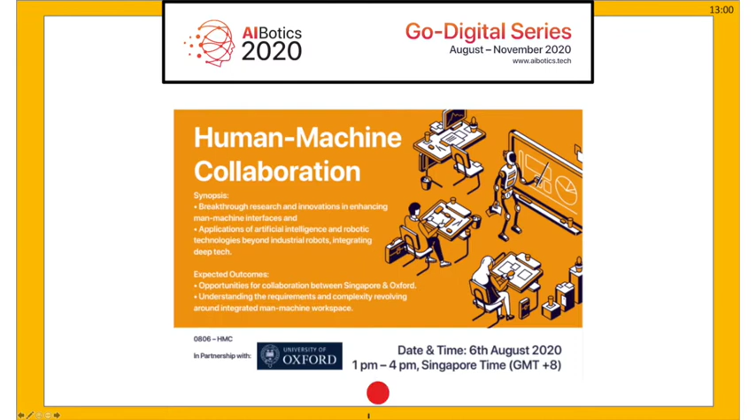The first presenter is Professor Nick Hawes, representing the Oxford Robotics Institute. Nick is leading as a principal investigator this Oxford research program, and he will deliver a talk about the long-term

and large-scale autonomy. Thank you for the invitation to speak, and thank you for all the amazing introductions from the invited speakers beforehand. So it's a great pleasure to be here speaking on behalf of the Oxford Research Pillar within the Oxford-Singapore Human-Machine Collaboration. I'm sharing the session with a colleague from Singapore, Professor Marcelo Ang from the Advanced Robotics Centre at NUS. I'm, as Sarolta said, representing the Oxford Robotics Institute at the University of Oxford.

And we're paired up together because we both have similar interests in this question of large-scale and long-term autonomy. And our work focuses on, I'd say, enabling AI and robotics technology for human-machine collaboration, but not really the direct interaction of humans and machines, more about how we build autonomous systems that work for humans and alongside humans in a range of environments. So those are our main interests, and what we're going to talk about here is really the research level work that's going on, and as is natural with robotics and autonomous systems, how this is applied in various ways as well.

And they're going to be fairly brief presentations, and then we're going to have a little bit of discussion between the two of us on what we think maybe some of the open issues are. Okay, so that's the intro. I'm going to dive into my slides.

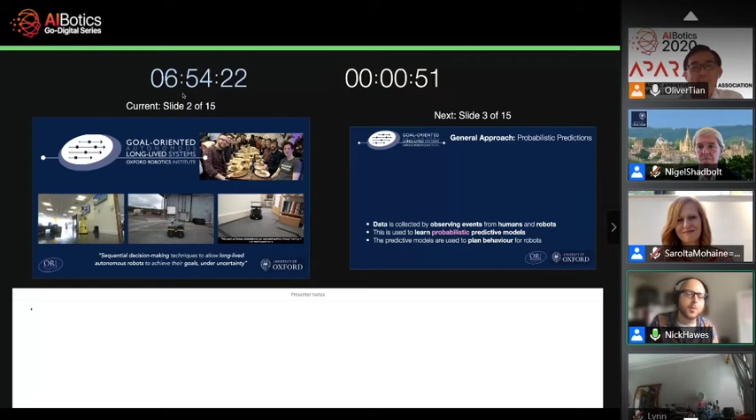So autonomous decision-making under uncertainty is key for robust, successful, safe, responsible developments and deployments in robotics in a range of applications. And I'm going to give you some examples of particular applications that we're interested in and particular angles that we're interested in as we go through the slides. So I thought I'd start off with maybe a general approach to talking about how my group works on this topic. And we think about the world in terms of probabilities because we're worried about uncertainty, and predictions.

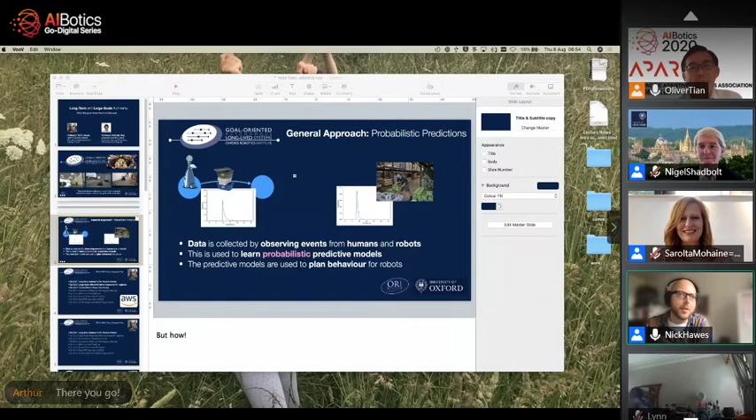So our systems work, oh crumbs, I'm sharing the wrong screen. There we go. Sorry. I tried to make this better and I shared the wrong screen. There we go. Right, sorry, give me a second. Right, well that's highly embarrassing. I think we're all hyped up for our level of technological prowess, then I make a rookie mistake on the sharing. I wanted to change the screen from my desktop to my laptop so I could look at you while I talked, and then I shared the wrong screen. Excellent. In my defense, it's before 7 a.m., so I'm going to apologize for that. Right, maybe in case you didn't see, that was the intro screen.

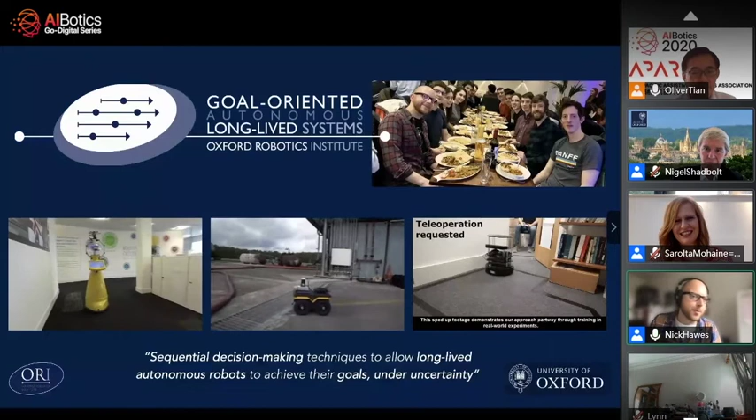Here I talked about the research of my group, and then we'll jump into the key topics of how we work. So we work with probabilistic predictions. The general idea is that when a robot acts in an environment, it performs tasks, whether that's moving from A to B, whether that's picking a package, whether that's interacting with a human. It performs those tasks repeatedly. And we can gather data. So Nigel talked eloquently about the role of data in robotics and AI. And we can use it in terms of characterizing the performance of a robot. We can capture that into some kind of probabilistic representation.

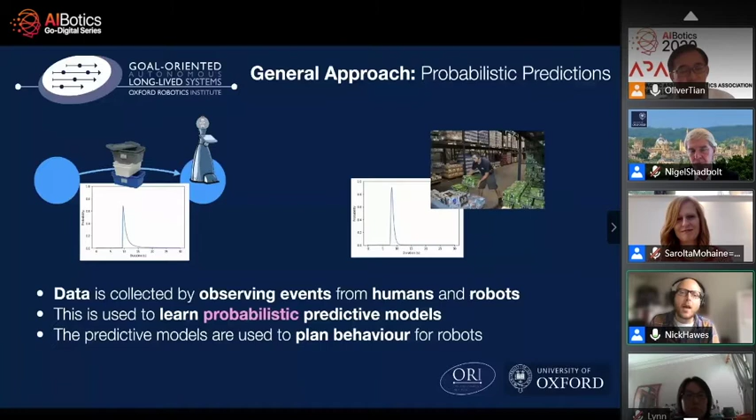And we can do the same with human behavior. So when a human's performing a task, such as picking a crate in a warehouse or servicing a car in a garage, we can model all of these things in terms of their probabilities, how successful they are, how long they take. And then we can embed these predictive probabilistic models into structures that allow us to plan for how robots and how humans should behave to best deliver successful tasks under that kind of uncertainty.

And this is an approach that also, as Nigel said, mixes different technologies. We're interested both in machine learning to gather and capture these probabilities, but also more traditional plan-based and model-based AI, so hybrid systems that allow us to reason about the structure of these models and robot behavior under these kinds of uncertainty.

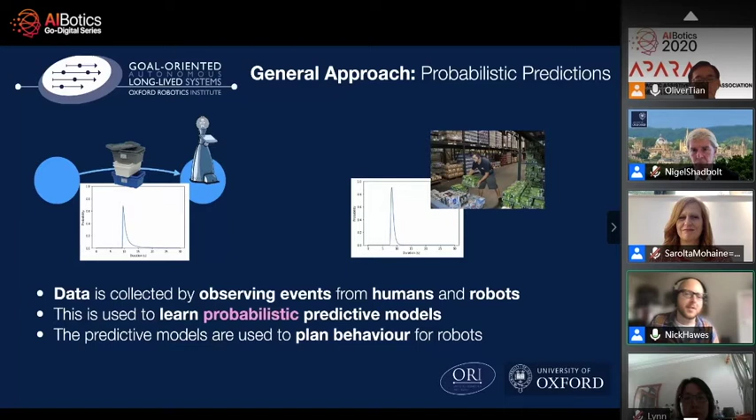So I'm going to talk about these techniques, so this kind of approach applied to 3 projects out of the 8 that's going on within the Oxford Singapore research pillar within the Human Machine Collaboration Initiative.

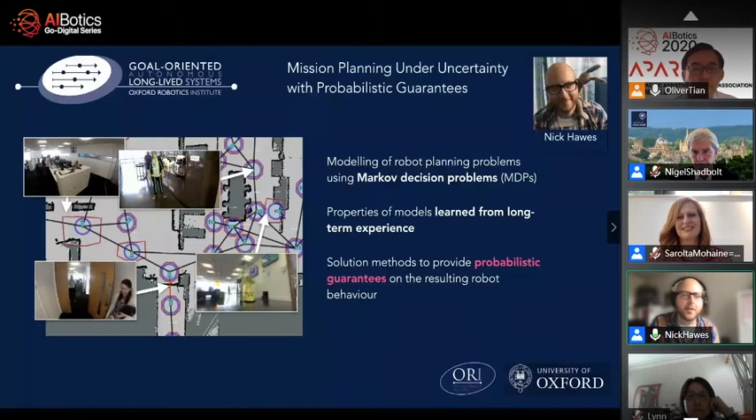And this is really important because what we found when putting robots into care homes, into offices, is that they encounter all sorts of failures. And those failures prevent the robots working successfully, and they also can cause hazards or delays in operation. So what we do is we take this general approach of running the robots in these kind of environments.

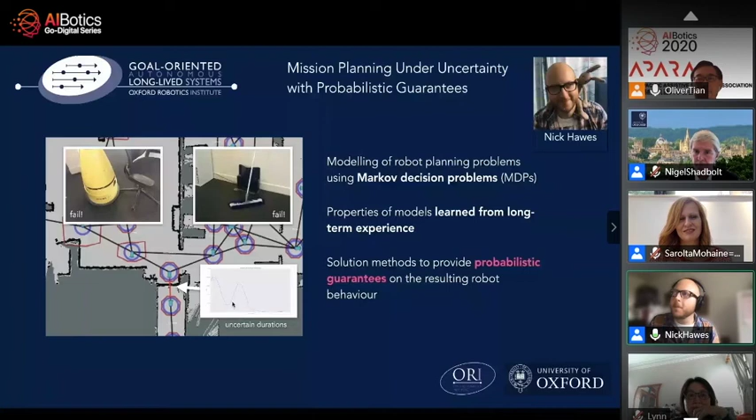We capture the data for failures, such as getting stuck on chairs as they're navigating, or having to deal with cleaners leaving brushes over charging stations. And also we have to capture data around the delays that human interaction or human collaboration causes. So in this case, this is the delay of waiting for a human to open a door. And we embed these into models that we can use to plan robot behavior.

Taking this approach, we deployed robots for years of autonomous behavior in a range of operations, from care, which you see down here, where we had robots working in care homes, providing assistance to nursing staff and sharing information, to security, monitoring humans in a range of situations, and office management.

So all of these robots are running plan-based guaranteed controllers that use data derived from everyday interaction, where these controllers get better every day because we get more data every day. So this really shows our general approach in action.

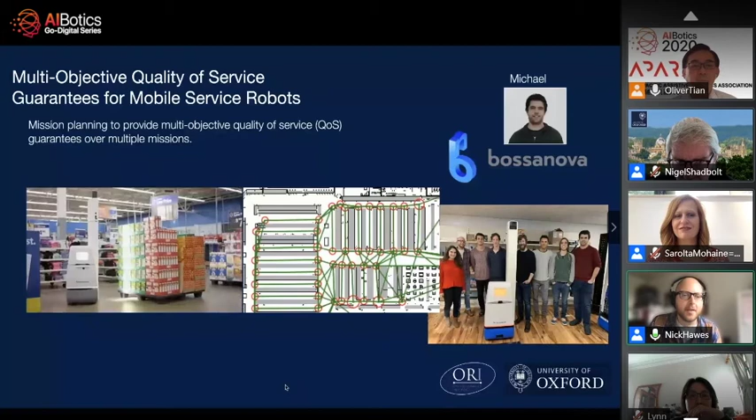We're applying this directly into retail now, working with Bossa Nova Robotics, where we're applying our planning techniques on their shelf scanning robots. They have robots taking stock in hundreds of Walmart stores in the US, and they're trialing some in the UK. And we're looking at how we can apply these planning techniques using data gathered from operation in order to improve the efficiency and reliability of robots that they're deploying into supermarkets right now.

If we move from here to logistics, increasingly companies are looking at logistics tasks where not just controlled robots are working in static environments, but where there's large-scale interaction between humans and robots. And those are very interesting application areas. So we're looking at applying these probabilistic planning techniques across teams of robots in logistics tasks, and particularly teams where the robots must respond to humans and vice versa.

So imagine you can sell a customer on a guaranteed quality of service or guaranteed response time of a robot fleet under dynamics. Those are the kind of plans we're trying to produce. So you can actually effectively promise a particular operator the level of response you get from a particular robot configuration. And this is, again, relying on this idea of collecting data under the hood and using those probabilistic models to plan robot behavior.

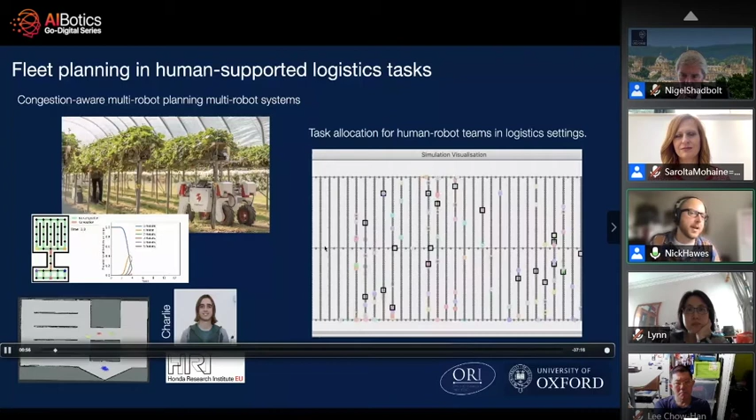So we're also using this idea of probabilistic models of logistics facilities to do some generative design work. So this is work joint with Accenture, who are a partner of the Oxford Robotics Institute. And they're interested in how probabilistic models of robot and human behavior can lead them to design better warehouse environments for their customers.

So our process takes an existing warehouse, and this is a warehouse at Blenheim Palace down the road from Oxford. And we can go there, we can put some robots into the sites, and we can gather some data about the throughput of the robot tasks in this environment.

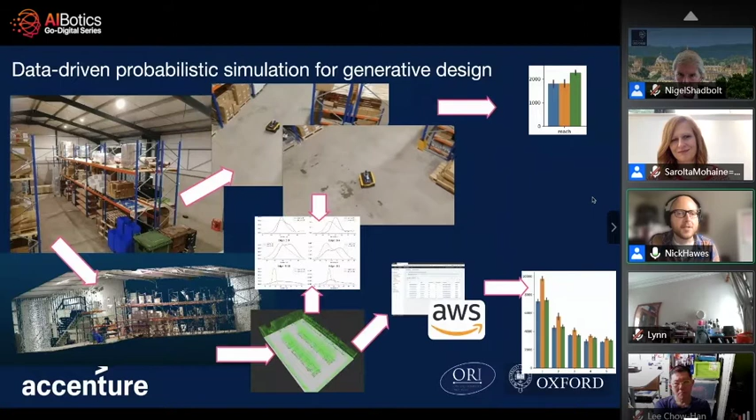At the same time, we can take a reality capture, a 3D scan, build various models, and compare reality to simulation before altering the simulation and running hundreds or thousands of simulations in AWS in RoboMaker to characterize a range of different environments.

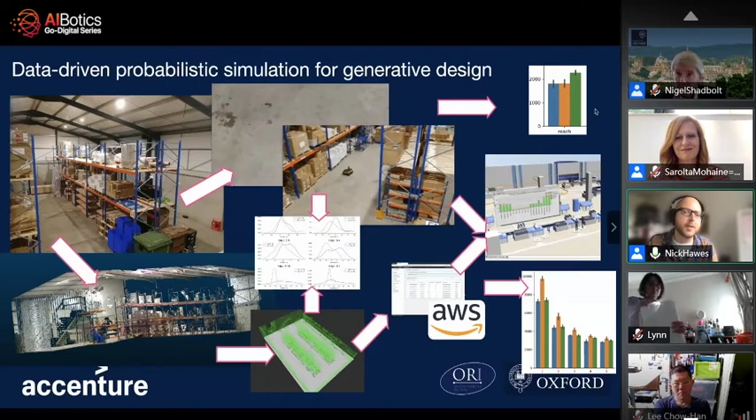So the great thing about this is it allows you to try different types of environments, different types of robot configurations, and create a huge range of simulations to test future applications. But we're doing it in a way that's founded on data coming from the real world and real robotics. So this really goes beyond some of the weaknesses of current discrete event simulators for these kinds of tasks.

I'm running a bit short on time, particularly because I screwed up the sharing at the start. I'm sorry about that.

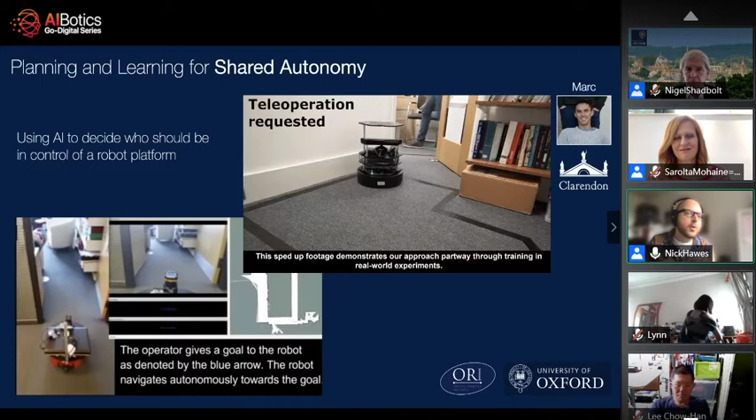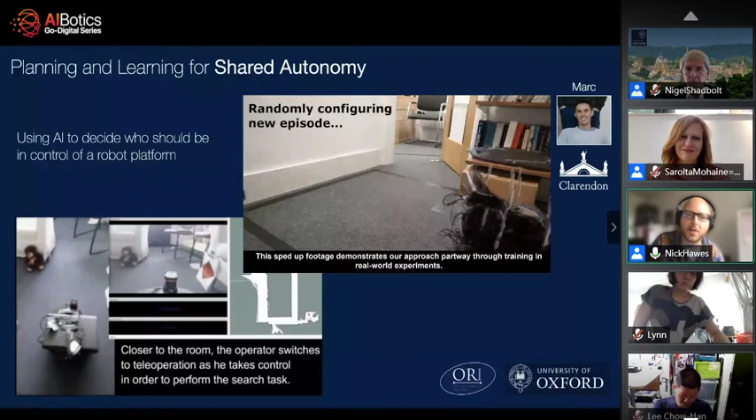So I'm just going to go for one last quick overview of the last project we're working in, which is human-robot shared autonomy. So in this space, we're hugely interested in who's in control of a robot platform. So is it a human operator? Is it an AI system? The most classic example of this is whether you have a human or an AI system in control of an autonomous vehicle.

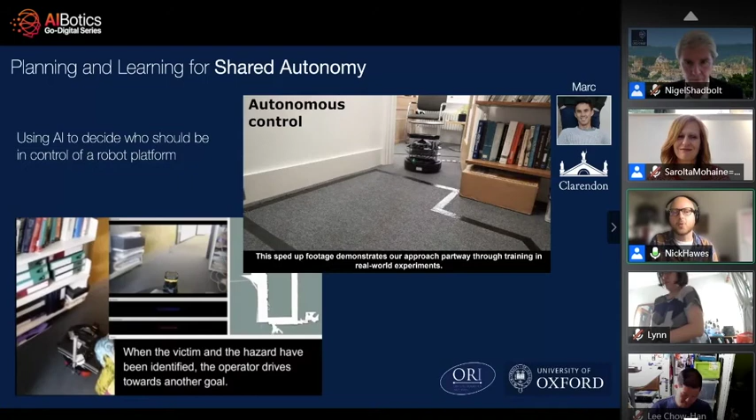But increasingly, this will be present in a huge range of high-risk or high-value applications where robots must work but cannot do all of the tasks themselves. And in these situations, you want humans to be called in for help, either to drive the robot or to train the robot. And so one of my key areas of research for the near future will be this task of shared autonomy. How can we decide when a robot asks for help and who the robot should ask for help in order to do tasks like search and rescue, which we see in the bottom left?

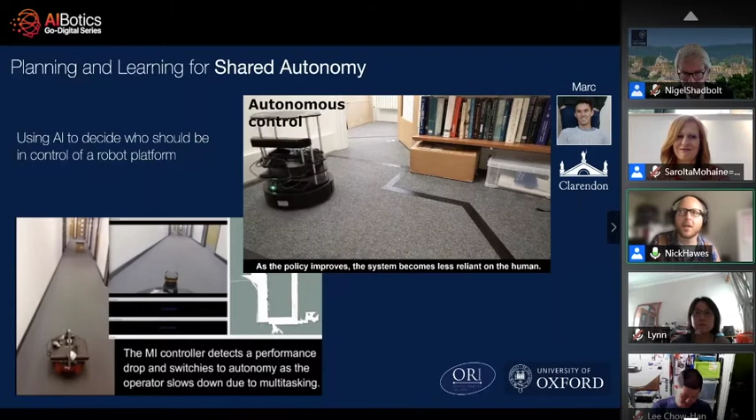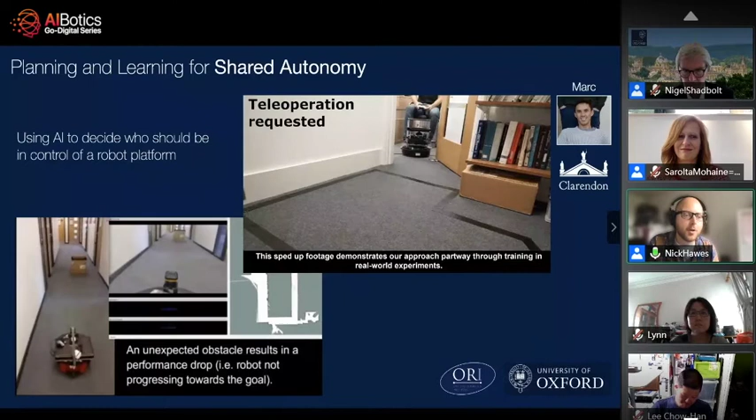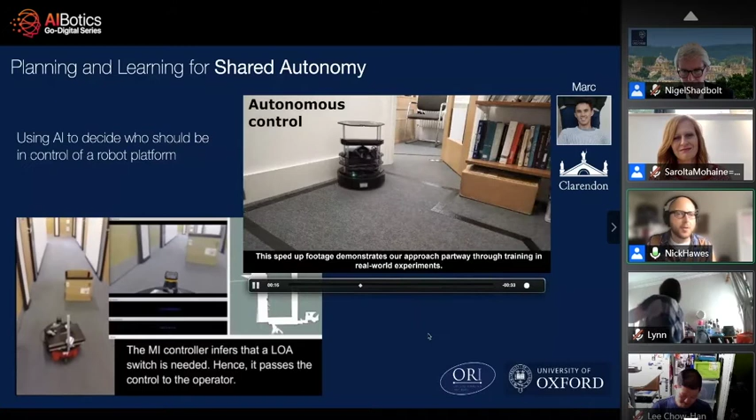So this is a robot searching for human survivors in a disaster zone, which happens to be a computer science building. That robot uses the human to solve problems for it, and the human can task the robot and switch the robot in various ways. In the top right, we see a human that is being called in to train a robot when a robot fails a particular physical task. And this is an area which I think will be hugely important as we increasingly deploy robots into new and challenging environments.

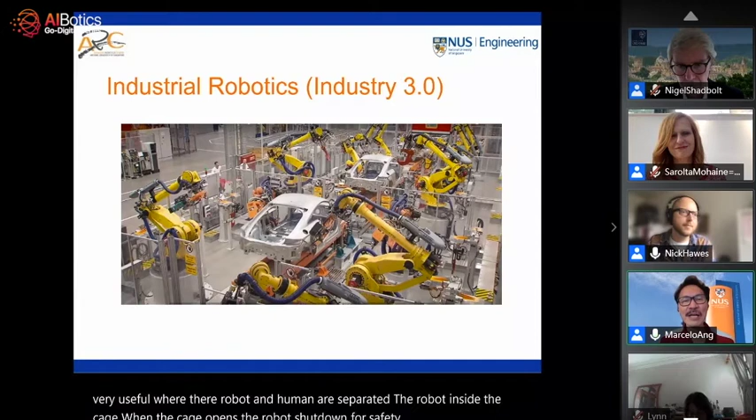So the key word is pervasive. What do I mean by that? I want to move away from industrial robotics, which is very useful, where the robot and human are separated. The robot is inside the cage. When the cage opens, the robot shuts down for safety reasons. I characterize this as structured environments, but we need to move towards pervasive robotics, that is robotics in our daily life, from structured human-robot separation to our shopping malls, our homes, hospital wards, and also in the grocery aisles, for example, where the opposing concept is unstructured.

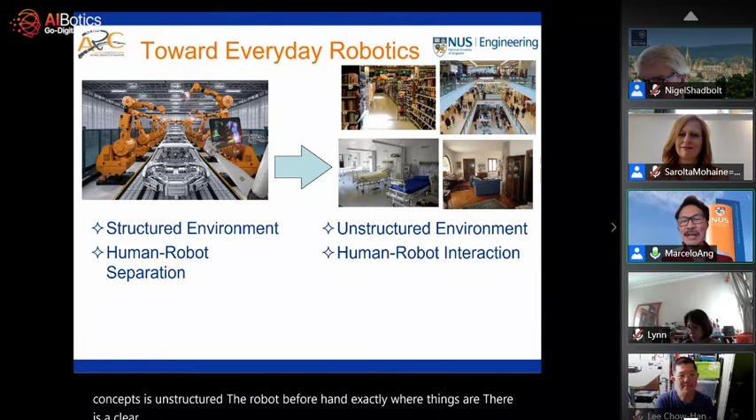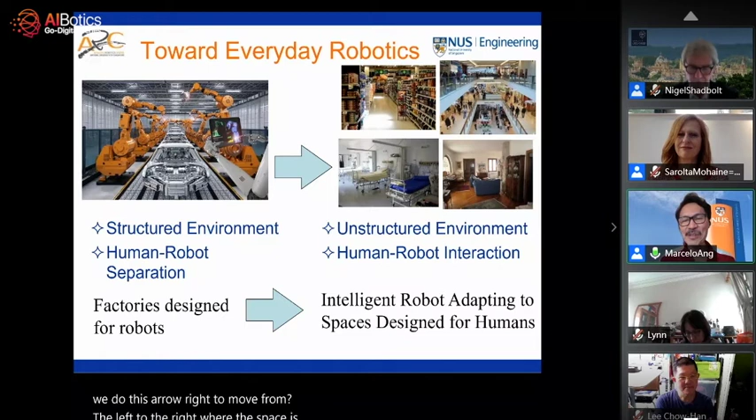The robot doesn't know beforehand exactly where things are. There is a clear human-robot interaction, no longer separation. And how do we do this arrow, right? To move from the left to the right, where the space is not designed for the robot, but designed for human beings, and how we can have robots adapt to it. So we view robotics as the ultimate helper.

A robot must have mobility, some wheels or legs, and must have some arm, and together with its body, a brain, but not in isolation. The human is also there as a co-worker for the robot, or co-companion. And there are many tasks that we do every day that we will have the robot that can help us do the task with us or do the task for us, but always under our supervision, right?

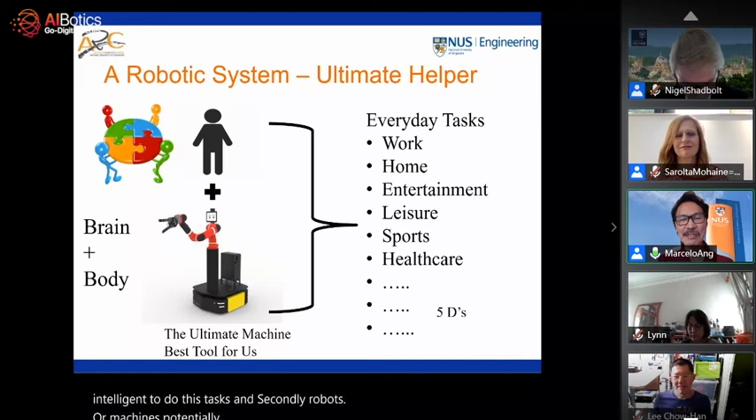So the brain, I'll focus more on the brain. We do 4 things all the time. First is see the environment or sense the environment and make understanding, context awareness. After we understand what's going on, we plan. After we plan, we execute the plan and we learn. And this is happening continuously. So this loop goes on and on.

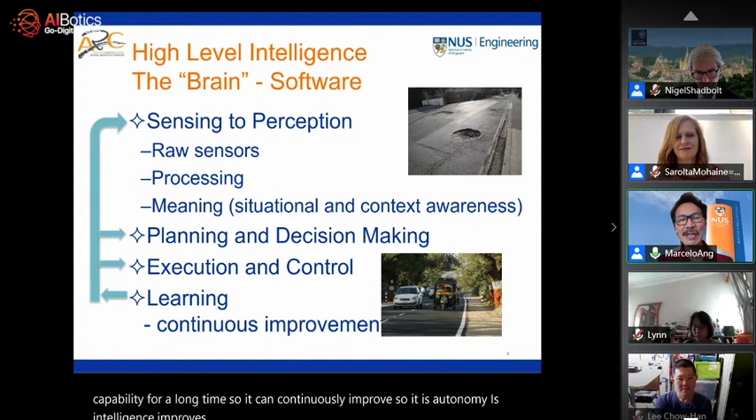And how can we have robots have this capability for a long time so they can continuously improve? So their autonomy, their intelligence improves all the time, working better and serving humans better. So in our brain, there are 2 approaches.

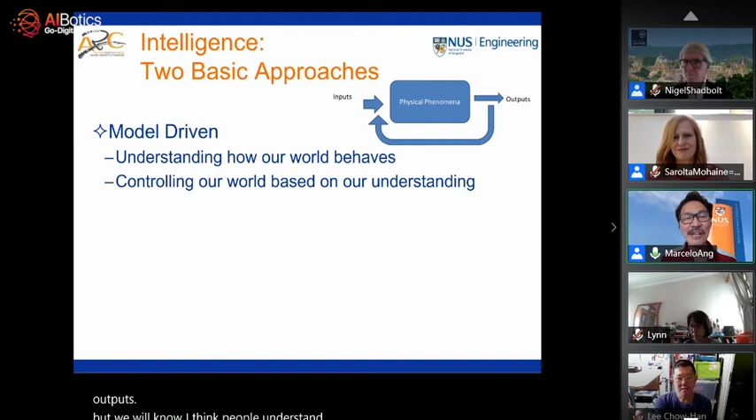The traditional approach is model-driven, where you use science to develop a mathematical model that relates inputs and outputs. And once you have the mathematical model, for a desired output, you use the model to compute the required inputs to control how our world behaves. But I think people understand now that this is very hard to do. It's almost impossible, because the other approach that humans perhaps use in our daily lives is data-driven approaches, where we

learn from experience. For example, for me to move to pick up a cup of water, I don't need to have a mathematical model of the dynamics of my hand, the weight of my hand, how my muscles actuate my hand. I just do it by trial and error. And that's the data-driven approach, right? And this is really the marvel of how our brain does it.

Perhaps the best way is a hybrid approach, which I think Nigel also mentioned, and Nick mentioned that too: how to combine data-driven and model-driven approaches, and use both. If we have some knowledge based on science, we use it, but we know it's not accurate. How can we use data to make it more accurate?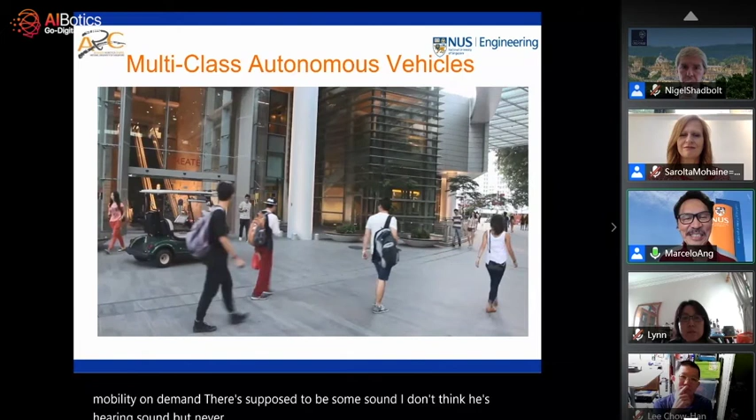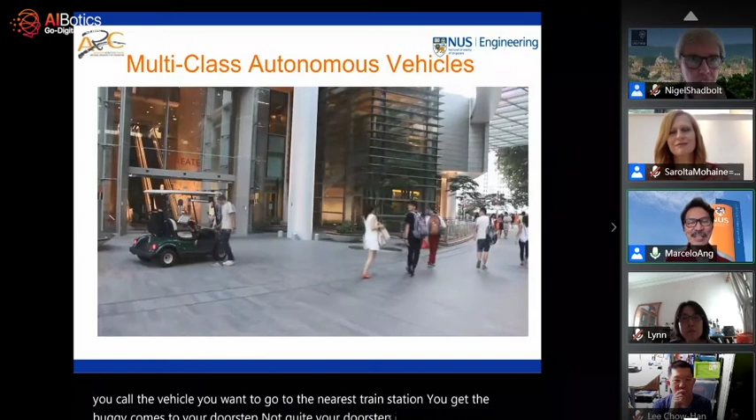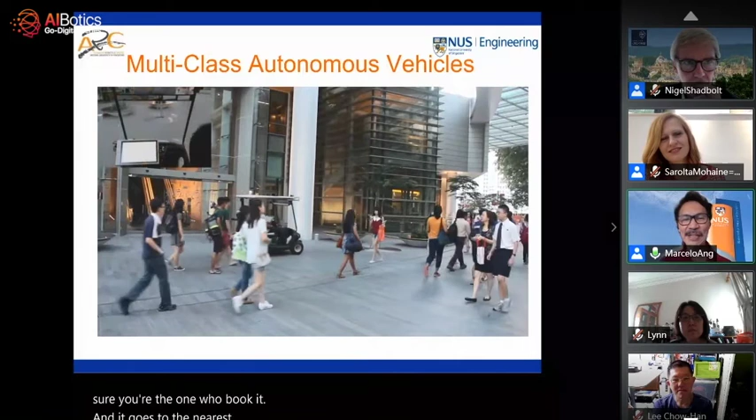So you call a vehicle, you want to go to the nearest train station. The buggy comes to your doorstep, not quite your doorstep, the ground floor of the building in our university town. You enter the buggy, you key in your PIN to make sure you're the one who booked it, and it goes to the nearest train station, not directly, because it has to go to a point where another vehicle meant for the road is waiting for you.

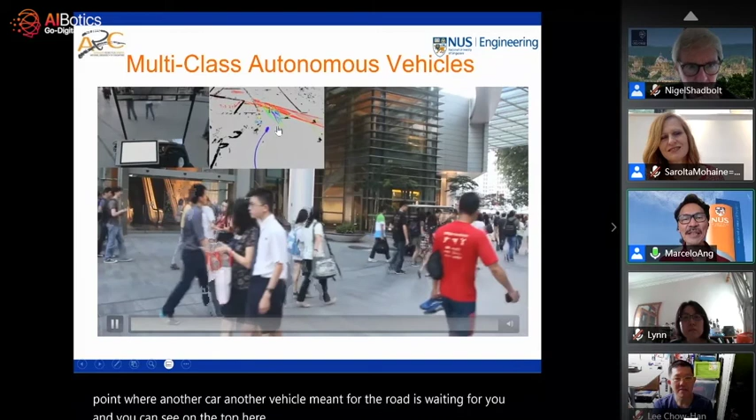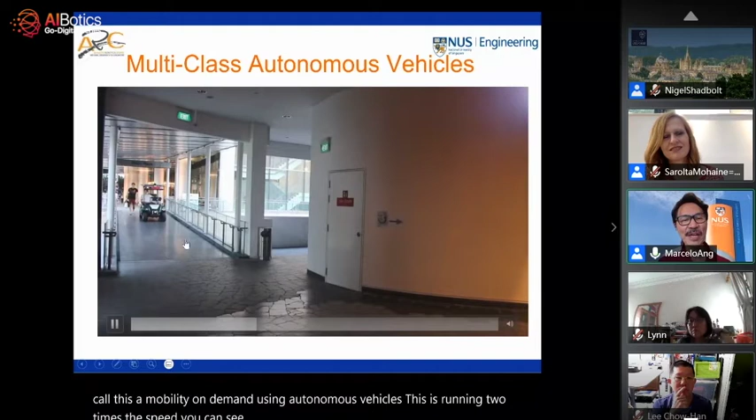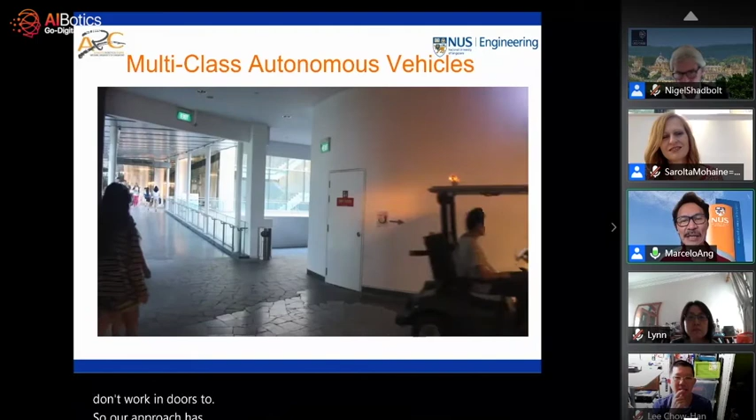And you can see on the top here how far ahead the sensors are seeing. And we call this mobility on demand using autonomous vehicles. This is running at 2 times the speed. You can see the human walking. This goes through buildings, because our vehicles do not use GPS, because it's not reliable and doesn't work indoors. So our approach has always been: the environment is built for human beings. How can the robot have its own intelligence on board so it can understand the environment and navigate through it without being told by the environment what to do?

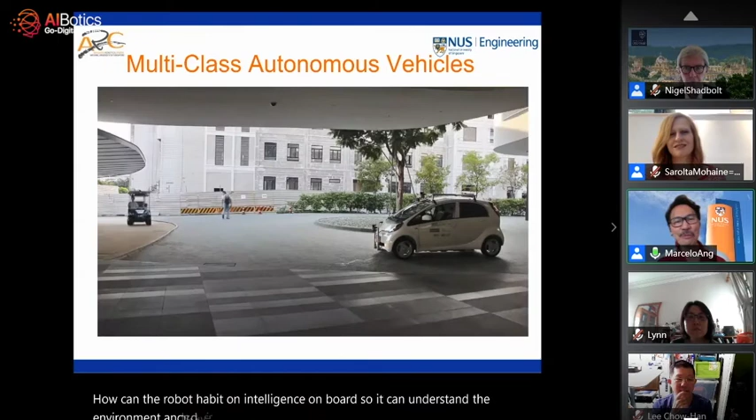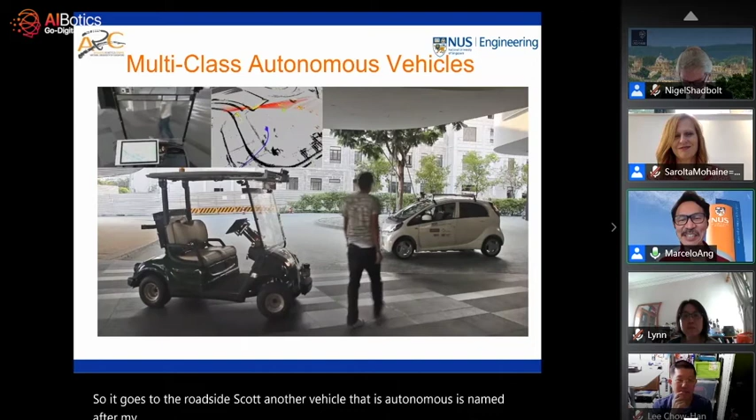So it goes to the roadside. SCOT, another autonomous vehicle, is named after my student Scott, and also means shared computer operated transport. And this is a move by Singapore to go towards a car-lite society where people don't own cars, but we have a very good public transportation system.

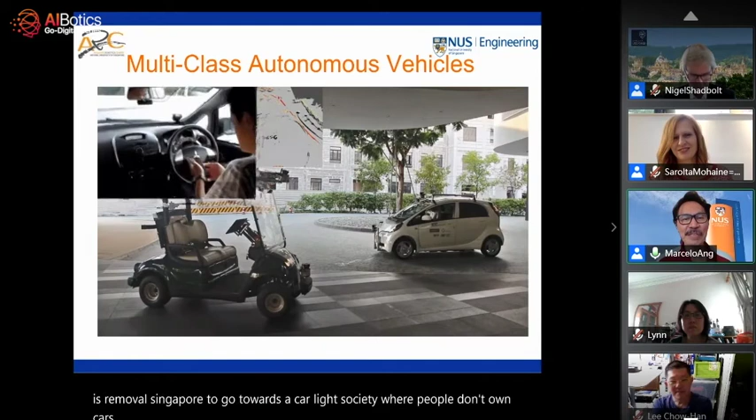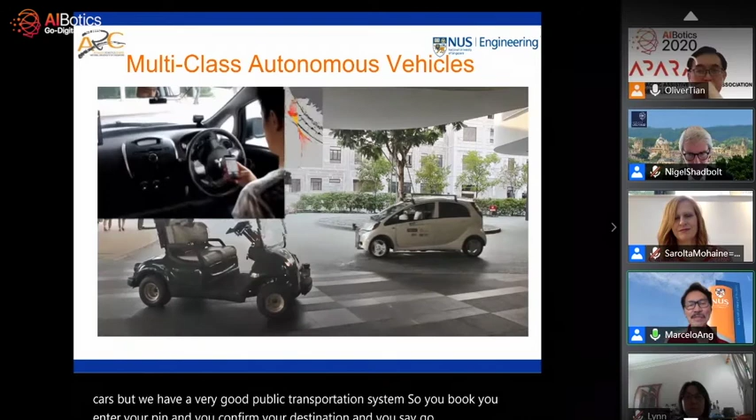So you book, you enter your PIN and you confirm your destination and you say go, that's correct. Then the car just drives itself. We don't build the car, we don't build the golf buggy, we just modify it and put in our computers and sensors to make it workable.

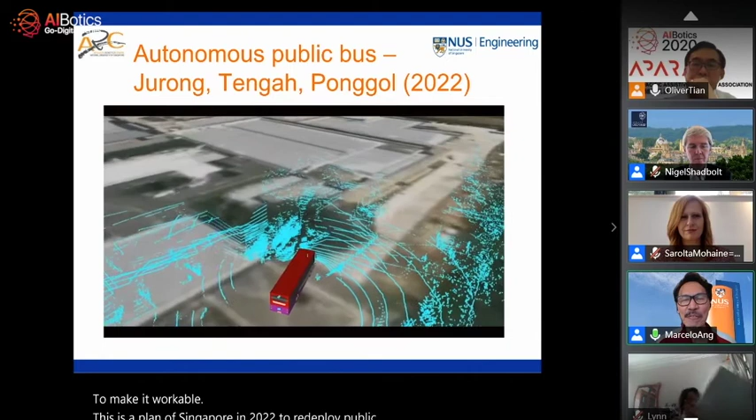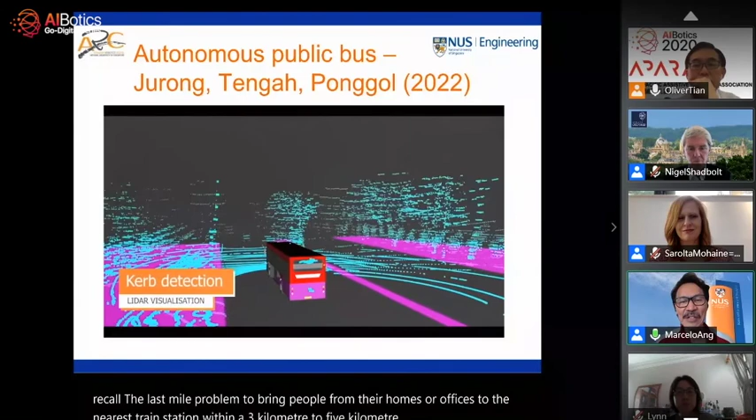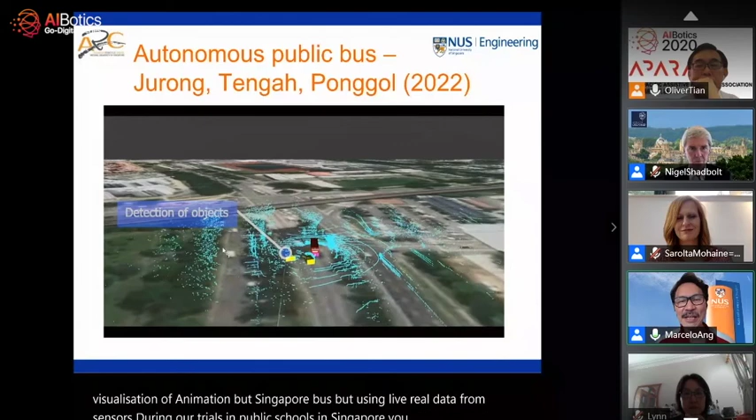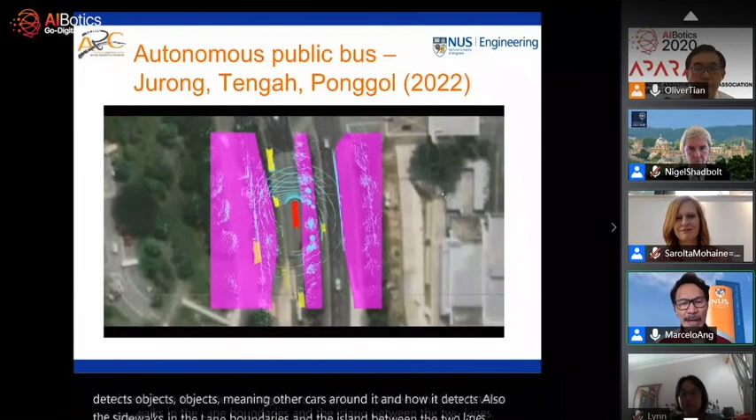This is a plan of Singapore in 2022 to really deploy public buses for what we call the last mile problem, to bring people from their homes or offices to the nearest train station within a 3 to 5 kilometer radius. This is a visualization animation for the Singapore bus, but using live real data from sensors during our trials on public roads in Singapore. You can see how it detects objects, meaning other cars around it, and how it also detects the sidewalks and the lane boundaries and the island between the 2 lanes of the road, and how much it sees on the left and right.

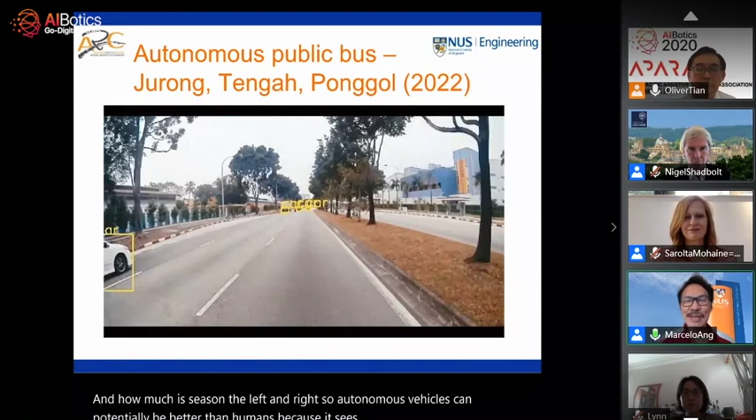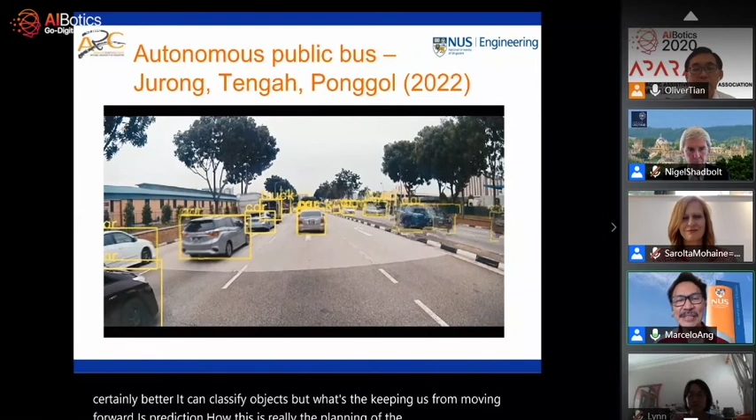So autonomous vehicles can potentially be better than humans because they see everything. Perception is certainly better. It can classify objects, but what's keeping us from moving forward is prediction. It's really the planning of the actions based on understanding the environment, because you can understand the environment as it is, but you cannot predict what the environment will look like 1 second later, 5 seconds later, a minute later, especially if there are human-driven cars.

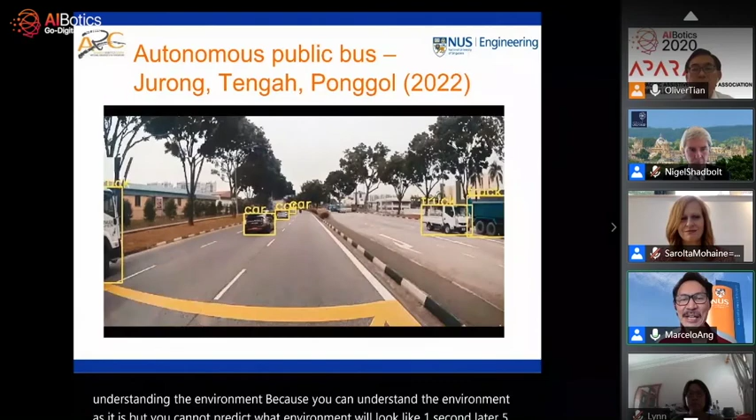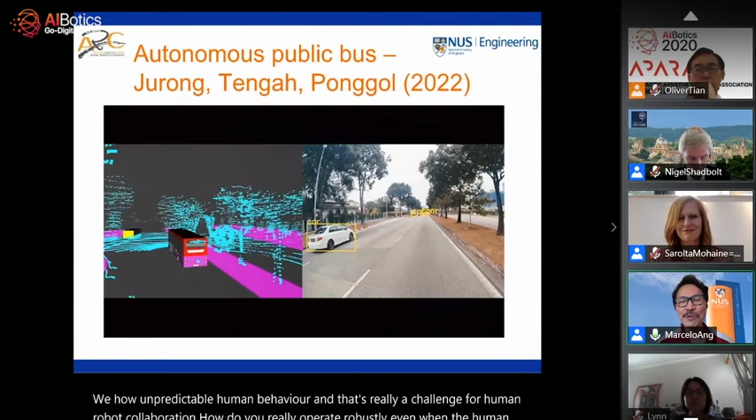We all know how unpredictable human behavior is, and that's really a challenge for human-robot collaboration. How do you really operate robustly even when the human or the predictions are wrong, and how do you improve your prediction? It's almost like us driving vehicles. How do we learn to be better drivers as we drive more, as we encounter more scenarios that we haven't seen before, and how do we improve?

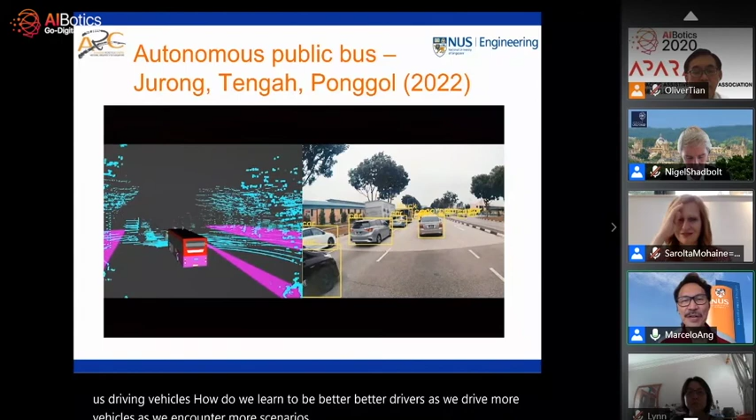By 2022, Singapore hopes to have these buses fully autonomous, level 5 automation, meaning no safety driver, doing the feeder service to the nearest train station.

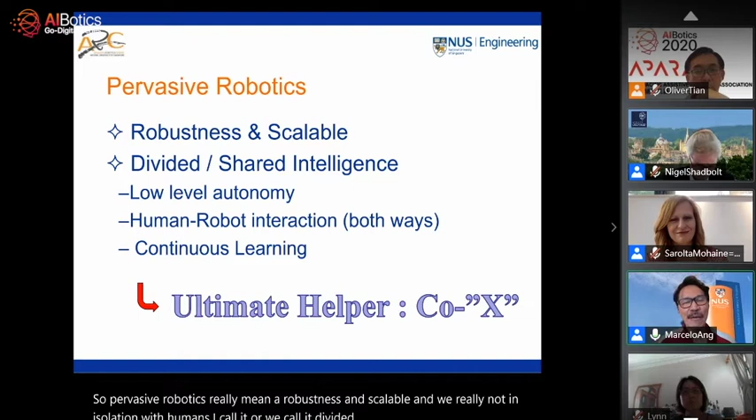So pervasive robotics really means robustness and scalability. And it's really not in isolation from humans. I call it, or we call it, divided or shared intelligence, where the robot or the machine has as much intelligence as possible, so the human literally just turns it on and off, and maybe for some exception handling, and how the human and robot work together by the human asking the robot to do things.

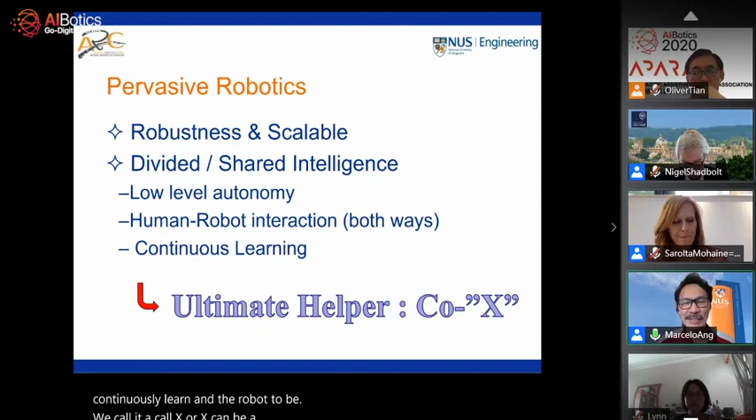How does the robot ask humans for help? So it goes both ways, and to continually learn, and the robot to be, we call it a co-X, where X can be a worker, helper, companion, would be the ultimate machine for all of us.

So the key challenges, I call it artificial generalized intelligence. There are two main important things. One is how much data is enough that you can trust the machine to operate safely and robustly. It's almost related also to the question that Nigel brought about on trusted AI, right?

There's a concept in engineering called persistently exciting trajectories. Perhaps we have to give data that are rich enough so that what you want to identify, the underlying models, will be revealed, right? It is somewhere buried under the data. That's first. Second is how is this data or knowledge represented?

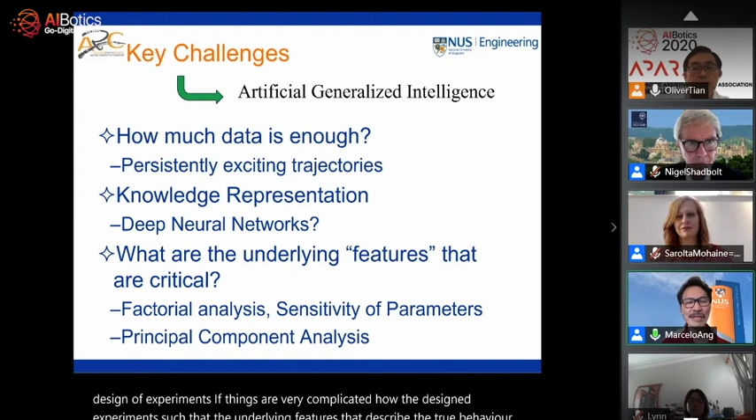And for lack of better models, right, we just fall back on our brains and a primitive approximation of our brain, which is the deep neural networks. And what are the underlying features that are critical? We can borrow from traditional engineering and scientific methods, perhaps principal component analysis, factorial analysis in design of experiments. If things are very complicated, how do you design experiments such that the underlying features that describe the true behavior of what you're trying to understand and control can be identified and revealed?

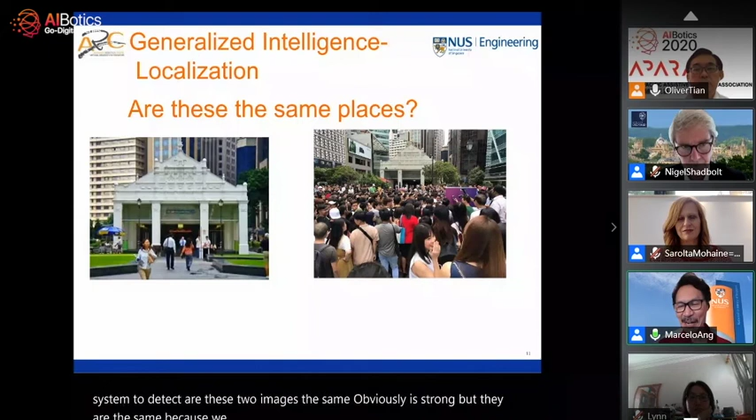So these are some of our more recent work in localization. This is a train station in Singapore, Raffles MRT. The left and right is the same station. If you use a vision system to detect whether these two images are the same, obviously it's wrong, but humans know they are the same because we know these people are temporary. So how do we localize by removing those non-permanent features of the environment?

But we need a lot of data. Humans are able to do that. The hypothesis is because we have lived long enough in this world. But generating data is very hard, right? I cannot get my students to keep watching the sky and wait for it to rain and take pictures. So we generate data synthetically through simulation.

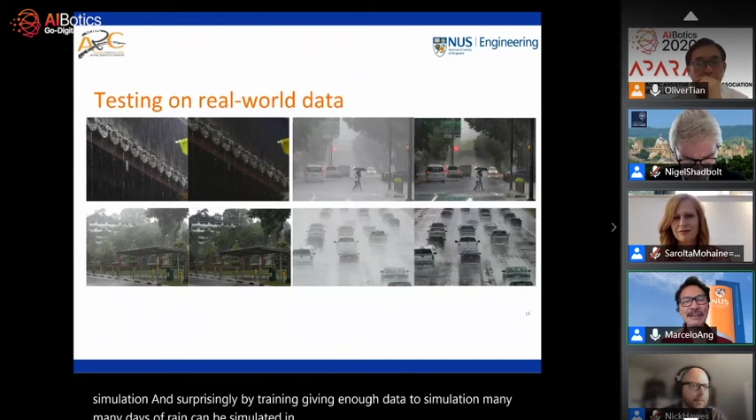And surprisingly, by giving enough data through simulation, many days of rain can be simulated in hours, and we can test it on real world data. And it's really nice that it surprisingly works quite well. The left is the rainy data, the right is after processing the real world data using our neural network to remove the rain. So the neural network does give us examples or motivation, inspiration to do that.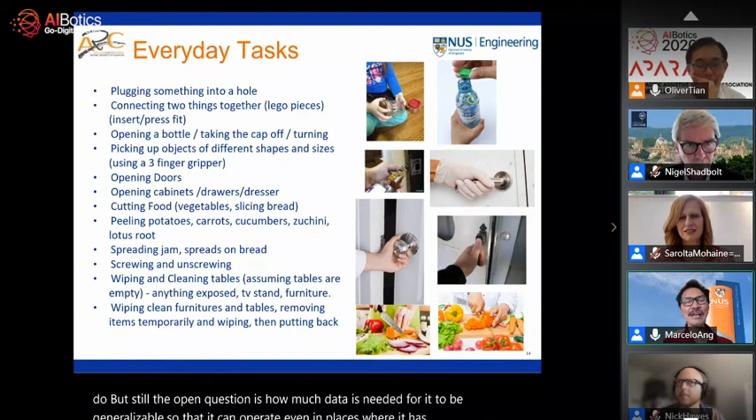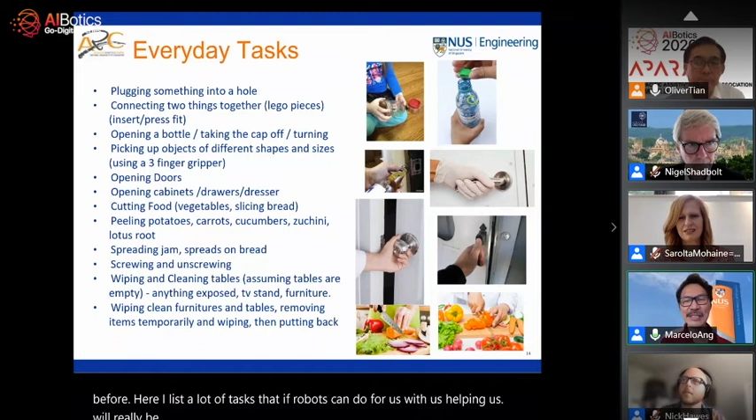But still, the open question is how much data is needed for it to be generalizable so that it can operate even in places where it has not experienced before. Here I list a lot of tasks that if robots can do for us, with us, helping us, will really be an improvement in everyday robotics in making robots really work for us. And all of this, the robots still cannot do today.

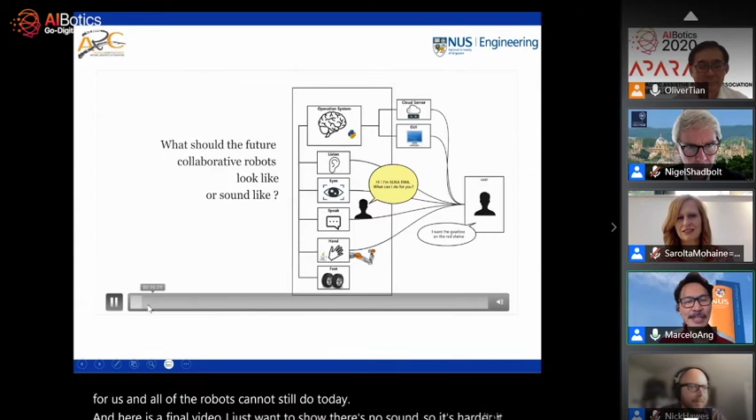And here is a final video I just want to show. There's no sound, so it's harder. But maybe I'll be the sound. I'll fast forward a little bit.

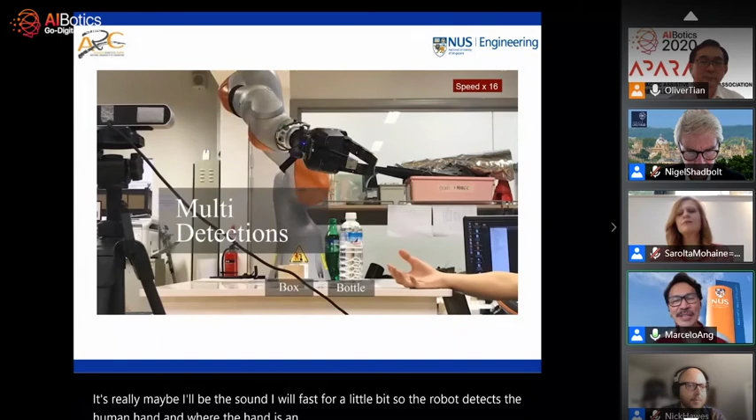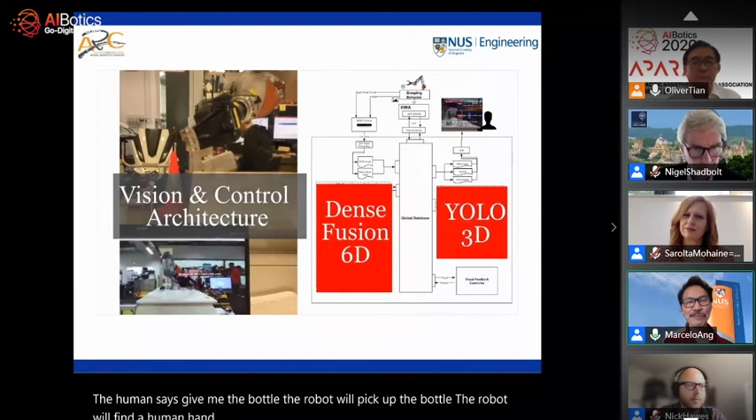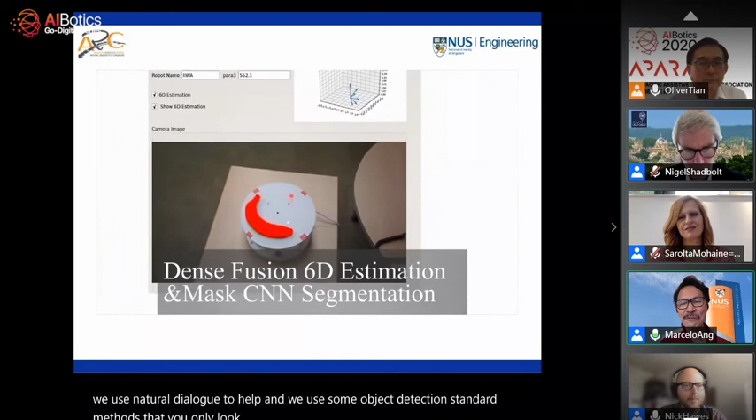So the robot detects the human hand and where the hand is and just picks up the object through voice. The human says, "Give me the bottle." The robot will pick up the bottle and the robot will find the human hand and hand it to you, right? So this is one example where we use natural dialogue to help, and we use some standard object detection methods, the You Only Look Once method, for doing the pose estimation of the object.

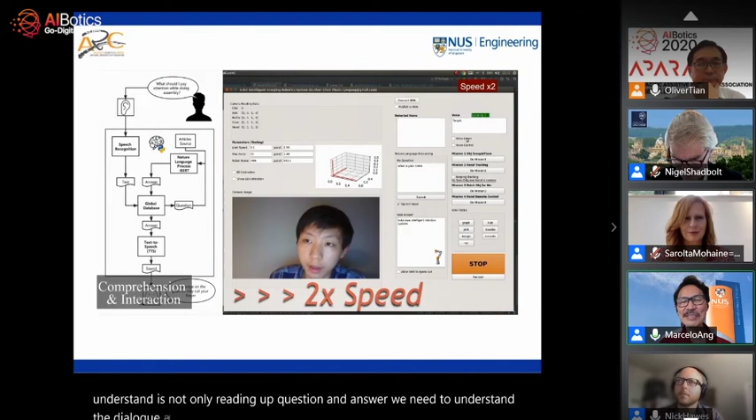Fast forward, and we have some dialogue, and in the natural dialogue interaction, we need to understand. It's not only reading up a question and answer. Right? We need to understand the dialogue and do a sensible interaction. So that's very important also in human-robot collaboration.